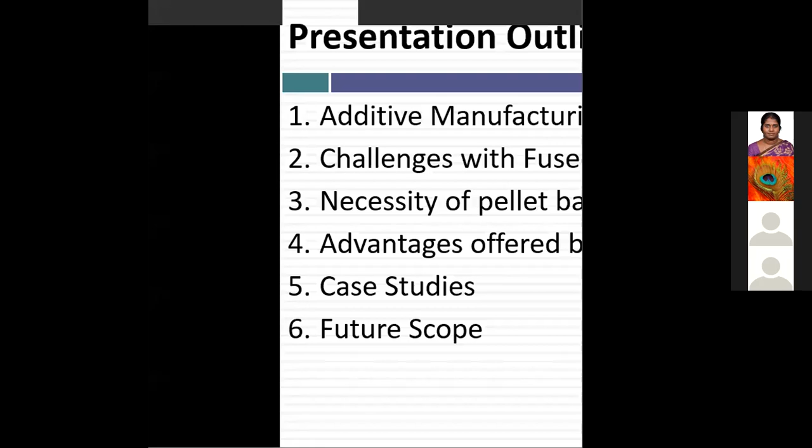Can we hide this? So these are my presentation outline. Ma'am, can you see my screen? Hello, sir, my screen is visible to you? Yeah, yes sir. Yes sir. Okay, okay, so these are my outlines for presentation.

First, I am going to give you an idea about additive manufacturing. Then I will cover some of the challenges which we face with fused filament fabrication technique. Then I will highlight the necessity of pellet-based additive manufacturing system. Also, I will discuss the advantages offered by the pellet-based additive manufacturing system.

Then I have some case studies on which I have already worked on. I will share those studies and then tell you the opportunities from where you can get some ideas and also start your own research work. If you are doing MTech or PhD, then these topics can be good for you. Then I will also discuss future scope related to the pellet-based additive manufacturing system.

So what is additive manufacturing? As you are already aware with this process because it's the fourth day of FDP, most of the speakers might have already covered this topic, additive manufacturing. So I will give you a brief idea, then move forward toward the pellet-based additive manufacturing system.

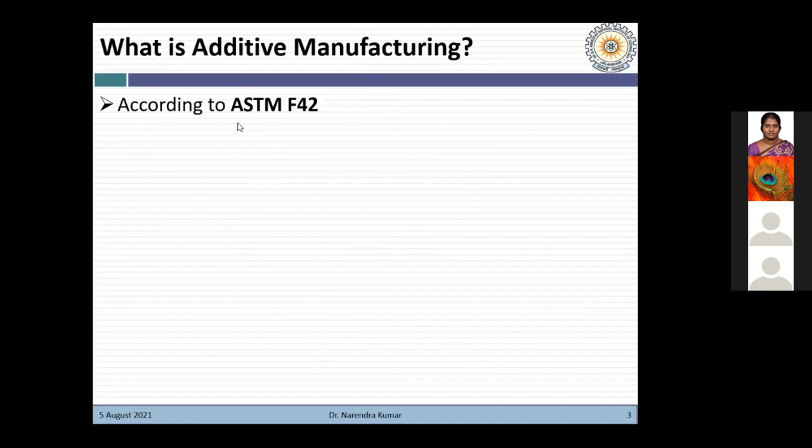So what is additive manufacturing? According to the ASTM F42 standard, it is a process of joining materials to make objects from 3D model data. So 3D model data should be there, and then we can make the objects by just joining the materials in the form of layers.

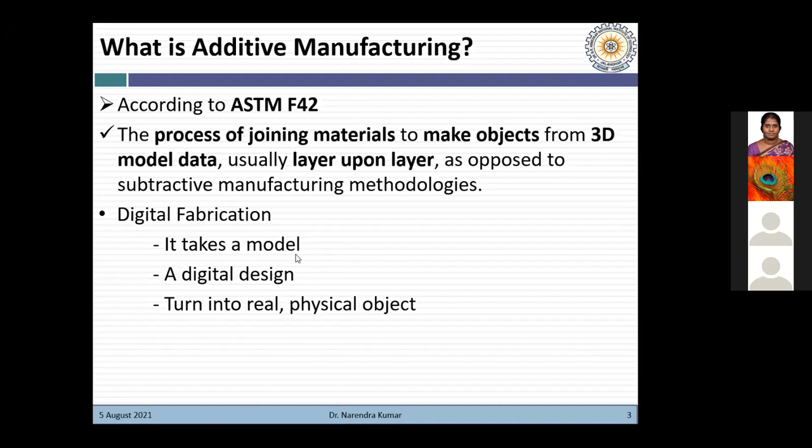So there is already a standard for additive manufacturing, called ASTM F42. They have already standardized the definition of additive manufacturing. It's a digital fabrication technique, it takes a model, meaning nothing but the 3D model data. If we have this data, then we can turn it into reality, into a physical object.

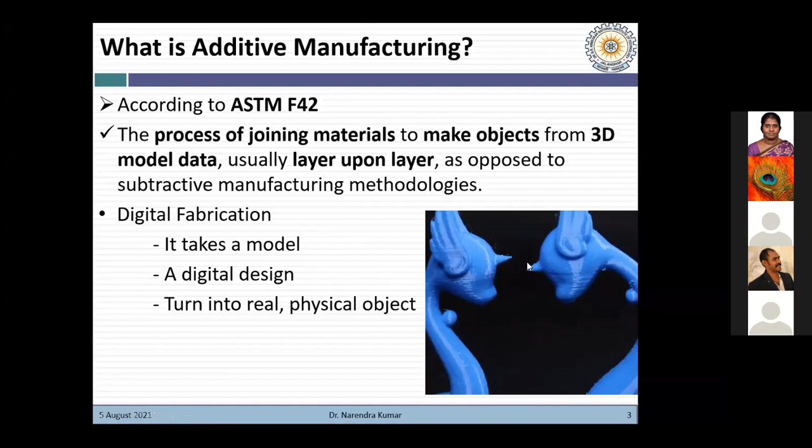Okay, so it's digital fabrication. You can see in this picture, we have a model. Initially there was a model, and then we have converted it into reality, a physical object, by just adding material in the form of layers. You can see how we are adding layer by layer, how this part is forming gradually along the Z direction. So this is the final object.

Can anyone tell me how to hide this particular option of the zoom? Can I hide it? Is there any option to hide this? Which one, sir? This one, ma'am. This is actually hiding my text. This one, ma'am. No.

So what is the process chain of additive manufacturing? First we prepare a CAD model, then move to tessellation, which is the approximation of CAD surfaces using triangles. Then we move to slicing, generate the tool path, go for part fabrication, and if post processing is required, we apply different post processing techniques on the printed parts to get the desired geometry.

So this is the process chain of additive manufacturing.

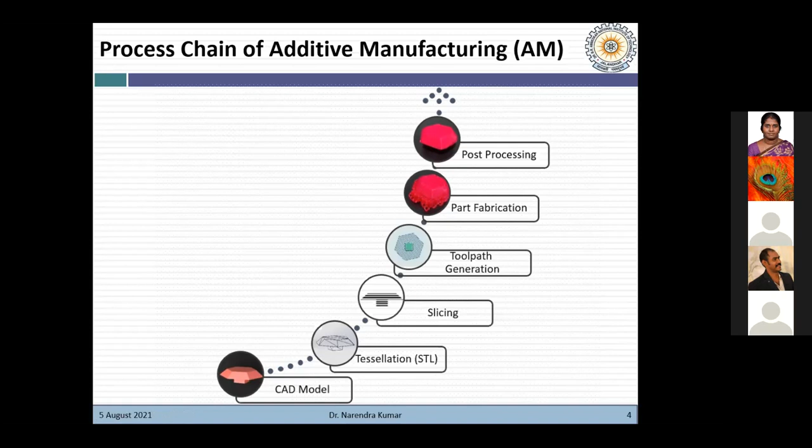What are the different types of additive manufacturing techniques available? I have categorized them based on the principle of making objects. First is material extrusion, second is vat photopolymerization, third is powder bed fusion, then material jetting, then binder jetting, and then powder bed fusion for metals.

Under material extrusion, the FDM technique is there, also known as triple F, fused filament fabrication. In this type of technique, we process the material by raising its temperature and extrude it in the form of wire using a nozzle. I will cover this process in detail.

Then we have vat photopolymerization, where we use material in liquid form. Here we have two processes, SLA and DLP.

The next category is powder bed fusion for polymers and for metals. The working principle for both processes is quite similar but there are little differences. For polymers we have SLS, selective laser sintering, and for metals we have selective laser melting, also known as direct metal laser sintering (DMLS), and another process called electron beam melting (EBM).

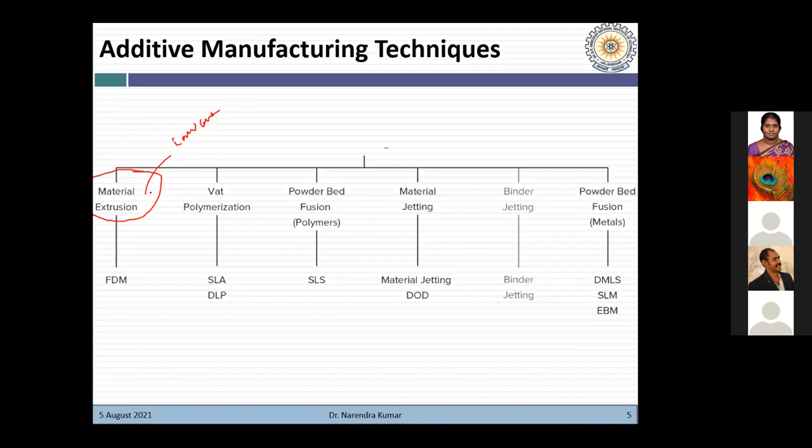This triple F process, or in short, another name for this is FDM. Most people are aware of this name, FDM. FDM and triple F are both similar in principle, but FDM is the word used by the Stratasys company, so it's more of a proprietary word given by Stratasys. That's why for open source printers, we use the term triple F, which if expanded means fused filament fabrication.

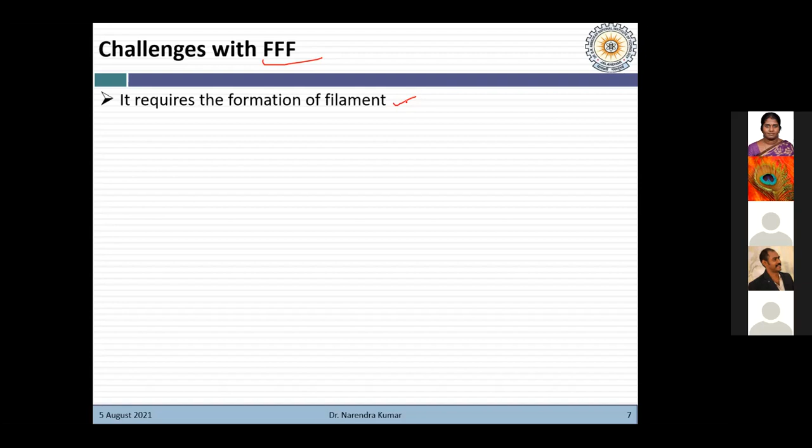Second is the requirement for material with specific mechanical properties. It means that it can process only specific materials, or special materials, which have the desired mechanical property that is required in the case of Triple F. Let me take one example to clarify this particular challenge.

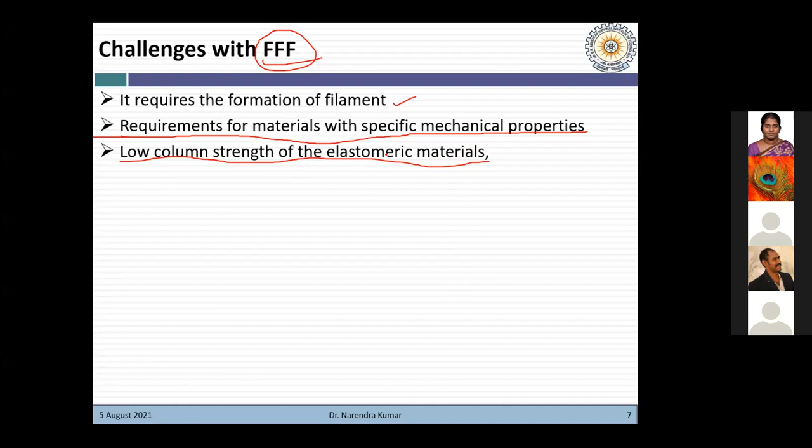So here I am giving you one property: low column strength. Low column strength of elastomeric material - due to this particular property, these kinds of materials cannot be processed easily by using these Triple F processes. So what is the meaning of this low column strength? It means that these materials are very flexible in nature.

So if we try to push - let me go back - if we try to push a flexible filament by using these rollers, what will happen? The filament will buckle, buckling will be there in between these two components. Suppose we are having a small opening, and now we are trying to insert the flexible filament into this opening - here we will observe buckling. The filament will buckle between the rollers and the liquefier opening. So due to this, what will happen?

You can see this is the case when we are feeding the rigid filament. Rigid means the normal polymer filament. When we are feeding a thermoplastic into this liquefier head of Triple F, there is no problem. These are your rollers and this is your filament, so there is no problem in the feeding of this kind of filament.

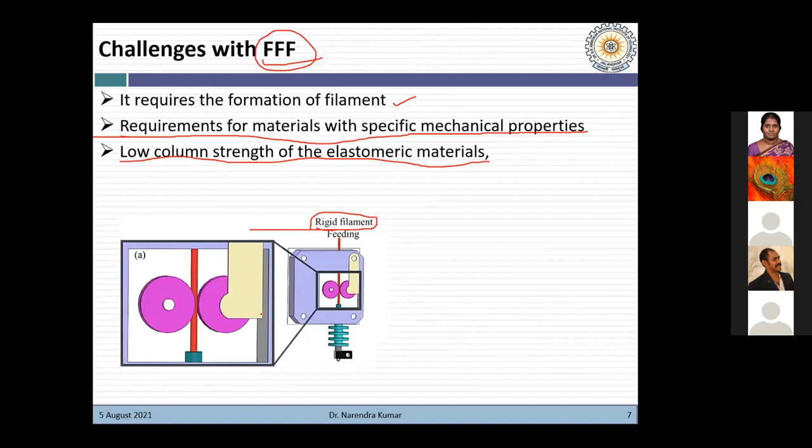But what happens when we feed the flexible filament or the elastomeric material filament into this opening? This can be the situation. Buckling may be there, and due to this buckling, we cannot process the material, or we have to modify our system, or search for an alternative to this particular process. So buckling is one of the main phenomena.

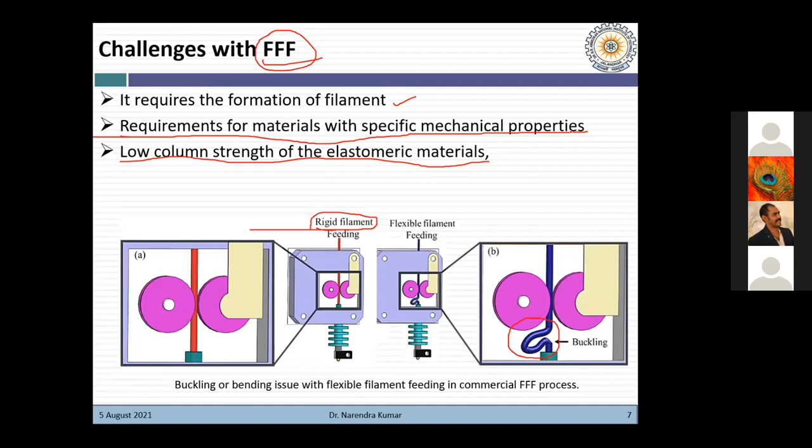That's why I am saying there is a requirement for material with specific mechanical properties. Only the materials which have the specific mechanical property can be processed by using this Triple F.

So what is the alternative? What are the alternatives available to this Triple F? The direct pellet printing can be a good option.

So suppose we develop a system in which the material form is different from the filament. A different form of the material may be the pellet.

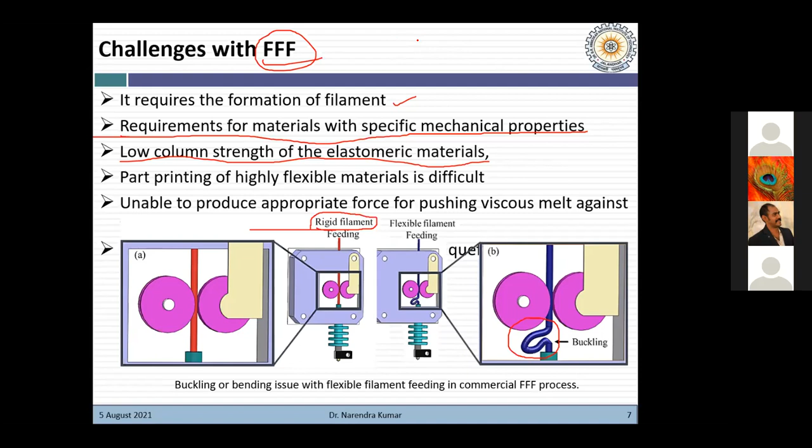Because materials are available in the pellet form easily, since injection molding machines or systems are already well established in the market. In those systems, we are already processing material in the form of pellets. So if we develop a pellet-based system, it could give us better results, and also give flexibility in using different materials. So direct pellet printing can be a good option.

You can see this is a printer which supports direct pellet printing. You need to feed the material in the pellet form. So here we have an arrangement in which we can feed this material in the pellet form.

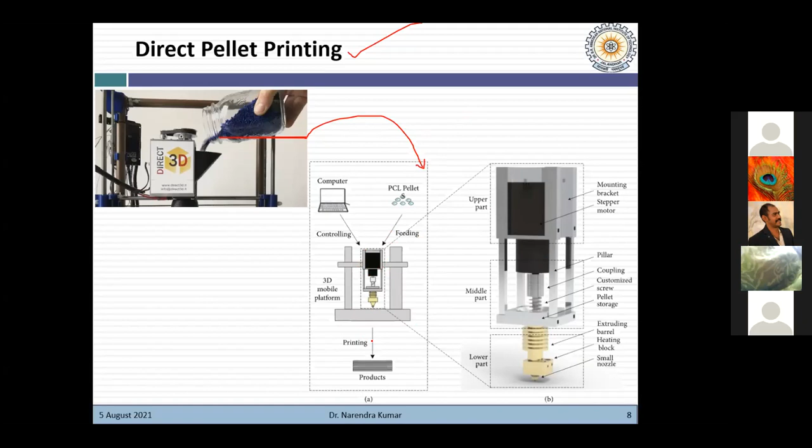This is schematically how the direct pellet printing process is shown. At the top we have a motor, then a coupling, then a mechanism to process the material in the pellet form. This particular extruder head, or special extruder head, can be mounted on the 3-axis positioning system. We have attached this extruder head on the CNC positioning system to create 3D objects. In this way, we can perform 3D printing of different materials.

So what are the advantages offered by the direct pellet printing systems? The first advantage is reduced melt solidification steps. So what is the meaning of this statement?

The meaning is, there is no need of filament. We do not need to convert the material into filament form, because initially we have pellets, then we convert those pellets into filament form, and only then can we process the material through the Triple F process. But in the case of direct pellet printing, we can directly process the pellet form of the material. In this way, we can reduce the melt solidification steps, as there is no need to remelt the material again for filament manufacturing or fabrication. So this is one of the advantages.

Second is the elimination of the filament extruder system. Here we can eliminate the filament extruder system and make a different type of extruder system that should be compatible with the pellet form of the material.

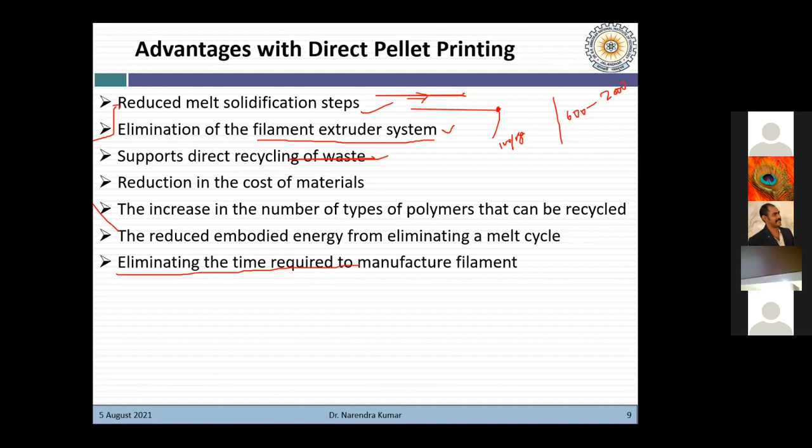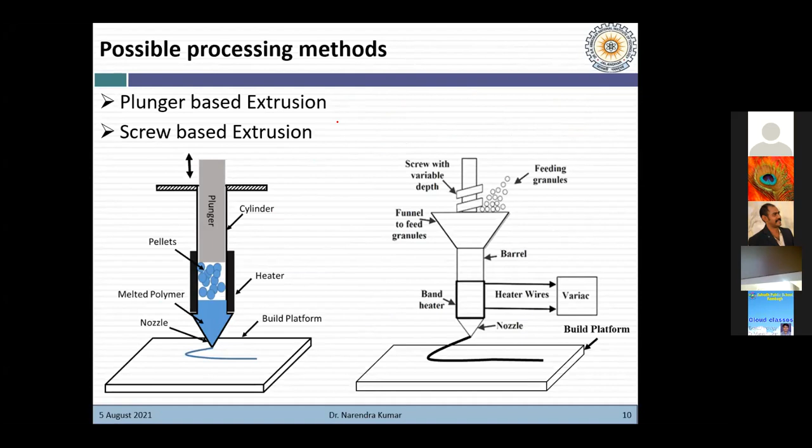So what are the possible processing methods we have? If we are planning to make a pellet-based additive manufacturing system, what kind of methods can we use? The first method is plunger based extrusion, and the second is screw based extrusion systems.

So here you can see the schematic diagrams of these two principles. In the first one, we use a plunger, which is basically a piston that moves in a to-and-fro direction. When it moves downward, we get extrusion of the material. In this cylinder volume, we can fill the pellet form of material, and here we have a heater which is used to raise the temperature of the material. Then we can extrude it from this small, tiny nozzle.

And in the second principle, we have a different mechanism for processing the pellet form of material. Here we have a screw and barrel assembly, with a barrel and a screw having variable depth similar to injection molding, which is used to process these granules or pellets. Again, we have a similar arrangement of heater and nozzle, from which we extrude the material in the form of a thin wire. So at the bottom stage, the same principle is used, but the material processing techniques, or the principle of material processing, are different in these two systems.

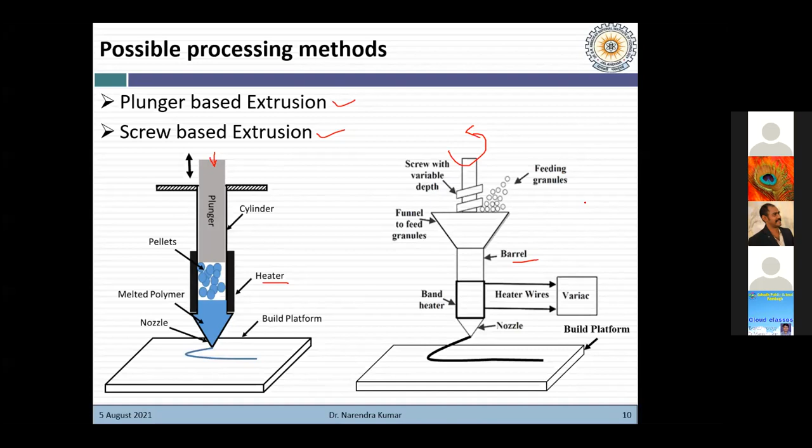That's why it is more useful in additive manufacturing, because nowadays people are focusing on composite part fabrication, polymer composite part fabrication. So tomorrow I will cover one lecture on polymer composite processing in additive manufacturing, where I will explain how to process a polymer composite material through FFF, what different methods we can use, and what different characterization techniques we have.

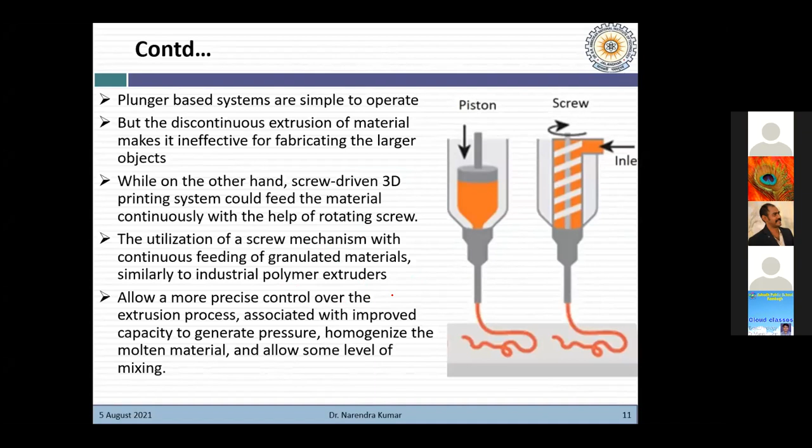So you can see the screw-based additive manufacturing systems are quite useful and can be explored further. I have some case studies on which I have already worked. A direct pellet printing system was developed by me during my PhD work, and I am currently exploring this area in a different direction. So I will show you those case studies, and accordingly you can think about direct pellet printing and its benefits.

So the first case study is the in-house development of a direct pellet printing enabled additive manufacturing system. In order to develop a pellet based additive manufacturing system, you can see the schematic diagram of the developed direct pellet printing system.

At the center, we have mounted a special material deposition tool that was also developed by us in the institute itself. It can be mounted on the spindle of the machining center. Here we have an enlarged view - the spindle is there, and here we have the deposition tool, mounted very easily on the center.

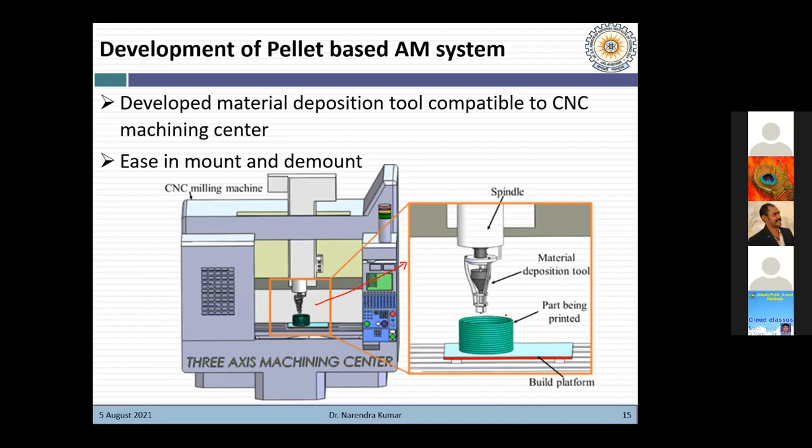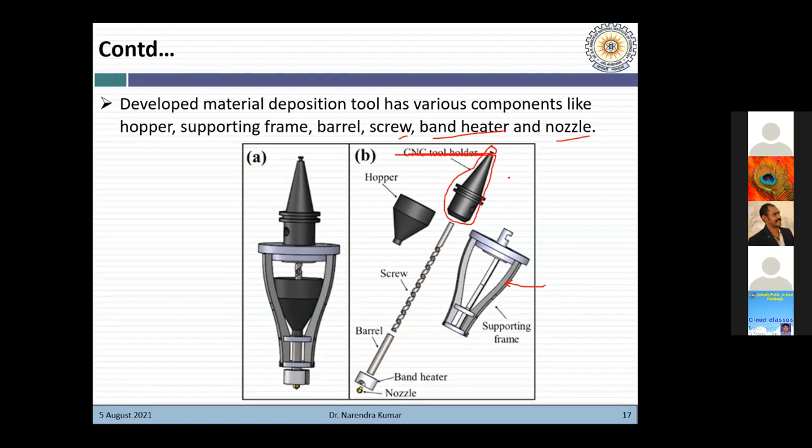Initially, we thought to explore standard materials because we wanted to see the performance of our system. So we started with ABS material, acrylonitrile butadiene styrene, which is a very standard material for the FFF process. All the process parameters are already known for that material, so we thought we should start with ABS, then move forward slowly toward other materials not already available for FFF. Initially we didn't have any idea how to proceed, so at that time we started with ABS.

You can see the shape and size of the part. Initially we were not able to extrude material in the desired pattern because we were not able to control the temperature properly, and various issues were there. Some issues to mention: blockage at the entrance of the barrel due to high temperature - a lot of blockage was there, so we were unable to feed material properly, and a lump of material formed at the entrance where material was entering into the barrel.

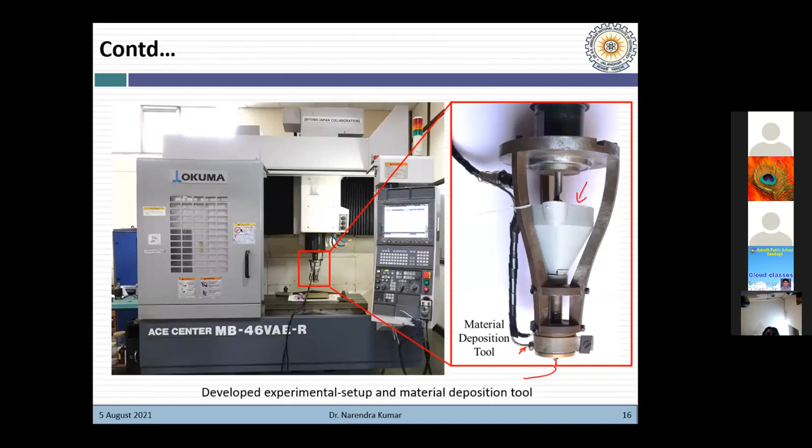Also during extrusion we were getting variation in the diameter, because at the bottom we had a nozzle - here you can see the nozzle. So we were facing the problem of variation in the filament, meaning extrusion variation, and also material degradation due to excess heating. We observed different colors at different portions of the part, so material degradation was visible. Also, there was discontinuous extrusion of material - sometimes we were having extrusion and sometimes we were not able to extrude material from the nozzle due to blockage and other reasons.

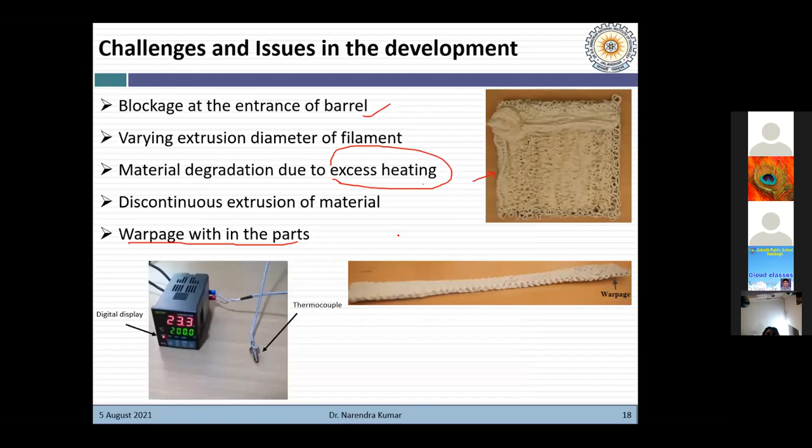Another problem was the software, because we didn't have any software for additive manufacturing. Standard machining centers are capable to remove material - if we have a workpiece, we can remove undesired material to get the desired geometry. But here the principle is different, because in additive manufacturing we make parts by adding material in the form of layers. So we didn't have any software for additive manufacturing.

So we developed our own software using MATLAB. We merged all the steps like STL import, slicing, toolpath generation, and G-code generation into necessary steps for generating toolpath, and we developed a user-friendly graphic user interface. So a GUI was developed that was very user-friendly.

We have provided a window on which you can see your STL file. Whatever STL file was imported into the software, you can see it in this window. And here we have provided a provision to change the value of process parameters - like layer thickness, currently flashing 0.1, which can be varied between 0.1 to 2 mm.

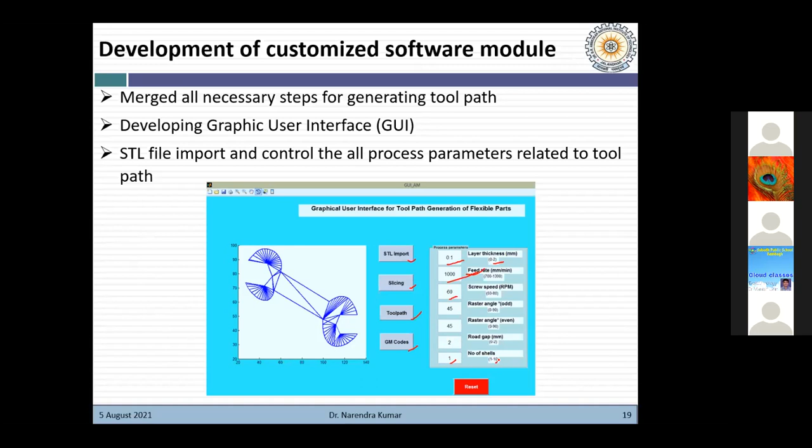Since we used a screw-based mechanism, 60 RPM was the speed of the screw, and raster angle was standard at 45 degrees. Road gap can be selected as per your requirement and application, and also the number of shells - shells means contours, how many contours you want around the periphery. Number of shells can be varied from 1 to 10, so you can choose according to your requirement.

Some features of the system software: import and processing of STL was quite easy in the developed software. Also slicing, then toolpath generation compatible to CNC machining centers.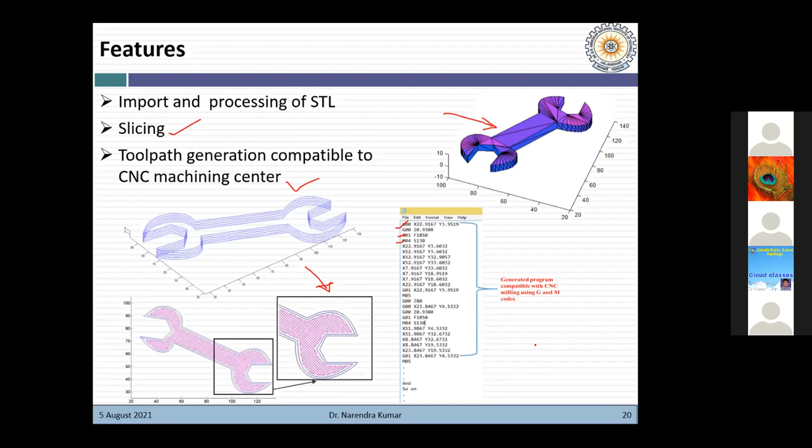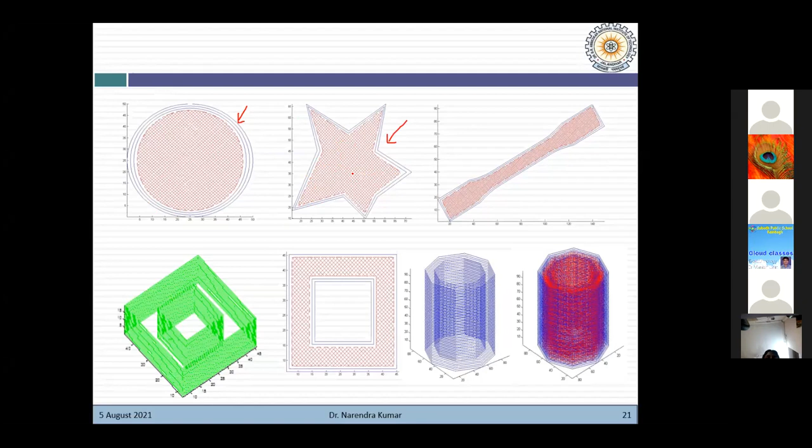Some other features of the software - in the first picture you can see we used 3 contours, 1, 2, 3, and the inner space is filled using a crisscross pattern. Similarly, here is another geometry generated with 2 contours or 2 shells, crisscross pattern again, and this is your tensile dogbone specimen, also generated with 2 shells and crisscross pattern.

This particular model has a hole at the center - a square shape hole. So again you can see the software was capable of dealing with different kinds of geometry, whether it is a solid geometry or a solid geometry with a hole.

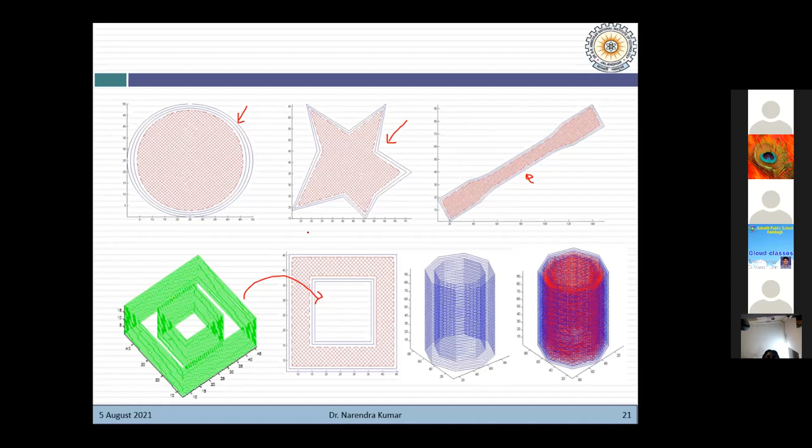Initially we printed this kind of product using ABS material, and you can see the quality of the parts is not that much good, but later on we improved a lot. I will show you some other pictures of the printed parts.

Another case study which we have already covered using this particular setup is flexible part fabrication using EVA material. I have already highlighted the challenges of FFF, discussing the difficulty of processing elastomeric material because they are very flexible in nature. That's why we cannot process those flexible materials using the FFF process. So we thought to explore this particular part fabrication through our setup.

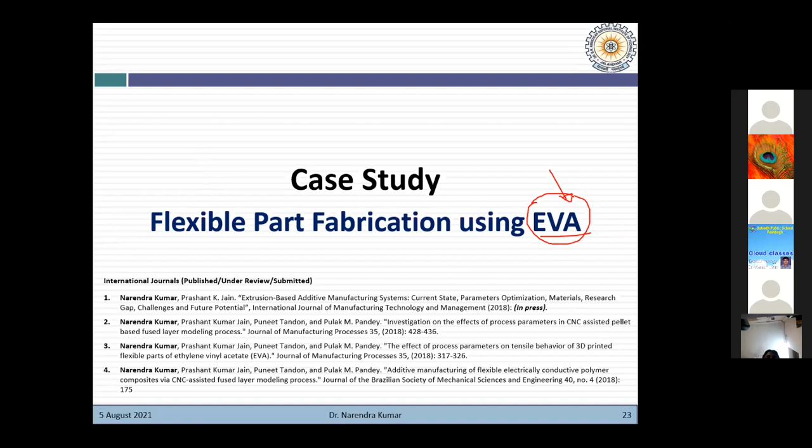EVA is one of the materials that is not available in the material library of FFF, but it is used more frequently in various applications. That's why we started with this EVA material, which stands for ethylene vinyl acetate. We selected it because it is flexible in nature.

We extruded this material from our setup. As you can see from the nozzle, we got this kind of profile in thin wire form. We initially explored this material to see whether it is extrudable or not, and it was extrudable, so we got this kind of thin wire profile in the initial experiment.

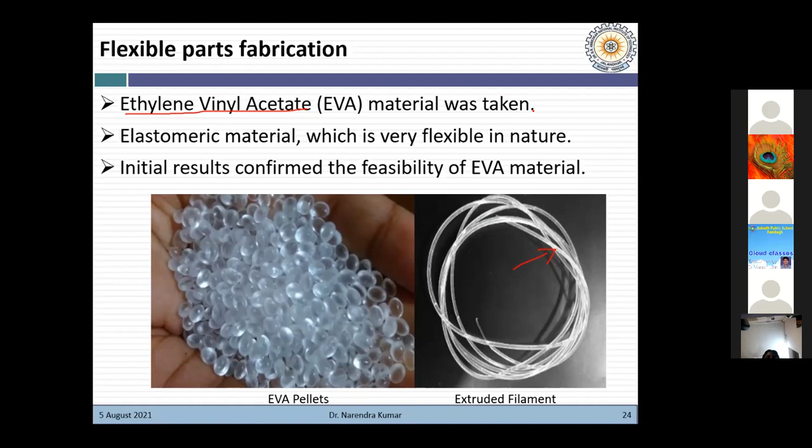Then we performed a parametric optimization. For this material, we optimized the temperature, the bed temperature, the screw speed, and the deposition speed. Various parameters were optimized by conducting the study, and statistical analysis was used to optimize the process parameters. Based on those results, a set of suitable parameters was obtained for this particular material.

Because we found out the range of different process parameters, we then tried to print some of the parts. I have compared these parts with this particular coin. Here you can see one part made by EVA, then again another part, then another part with a hole, and here a sole was also tried using this material.

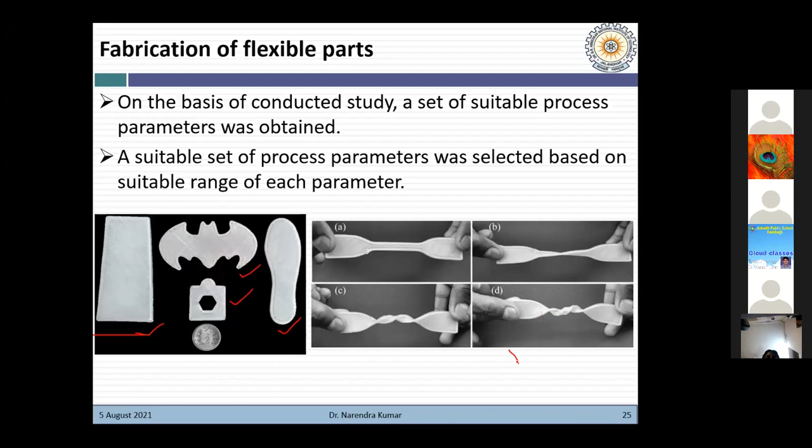In order to demonstrate the flexibility within the fabricated parts, one part was fabricated in the form of a dog bone, and then it was twisted like this, manually. You can see the results - there was no problem in the twisting, and we were able to twist it easily. This shows the flexibility within the specimens.

In order to characterize the flexibility within the specimen, we went through the hysteresis test. This test gives us the graph between residual deformation and deformation percentage. Initially we deform the specimen up to a certain percentage, then release the load and record the residual deformation. When we stretch these specimens up to 60%, only 1% residual deformation was there. Similarly for 90%, 9% residual deformation was there, and for 120%, 19.70% deformation was there. In this way, we have quantified the flexibility - this is one of the tests used for flexibility purposes.

In this picture, you can see we observed very good bonding between the rasters. Whatever material we deposited for the part fabrication, we found very good bonding between the raster. You can see the bonding between this contour and this raster - these are the rasters - so you can see good bonding between contour and rasters, and between rasters also.

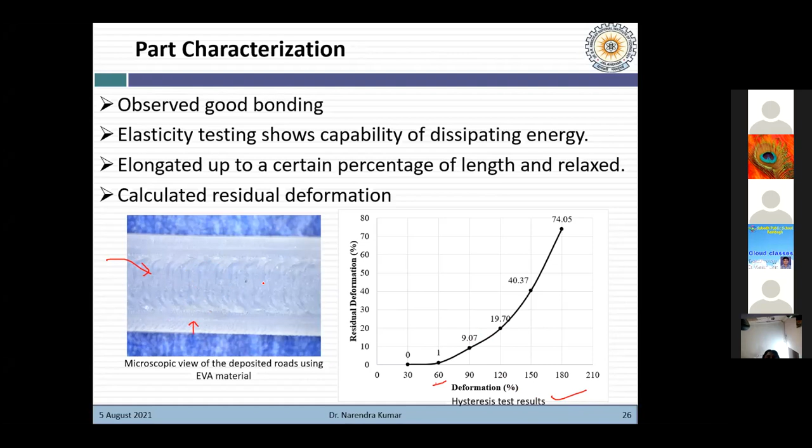So another case study is the flexible electrically conductive composite fabrication. Because we were able to extrude a material, EVA material, in the form of thin wire, we were also able to fabricate the flexible parts of neat EVA. So we thought we should extend our study in this direction, because we found a lot of applications of flexible electrically conductive composites.

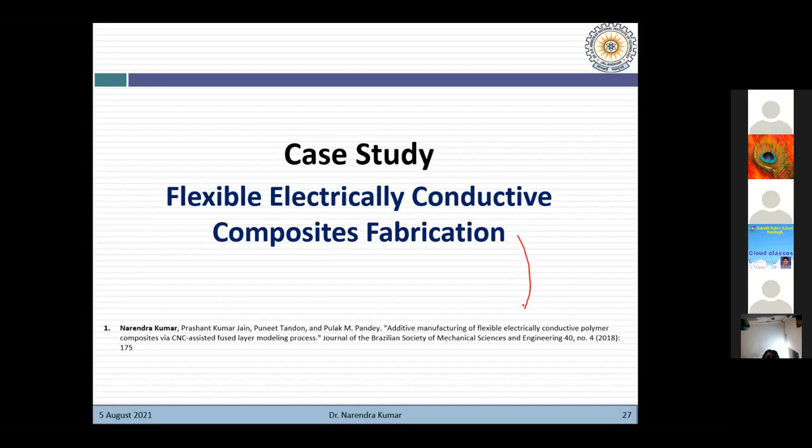More information about this case study can be found in my publication, where I have mentioned the details. Before conducting this study, we tried to find out some related research work in the literature.

In the first work, Rymansaib et al. used the FFF process with thermoplastic polystyrene as the polymer matrix, and carbon nanofiber, CNF, as the filler material. They evaluated the electrical conductive property.

Second is Wei et al., who again used ABS material as the polymer matrix. Similarly, Gnanasekaran used PBT, and Leigh et al. used PCL material. If you look at this literature, you will find all these materials are rigid in nature.

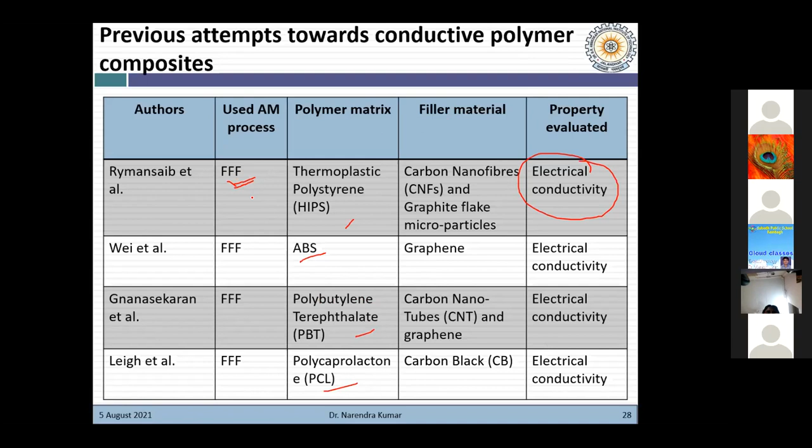All materials are rigid in nature, so very few studies were available in this domain. People have not explored flexible electrically conductive polymer composite fabrication through FFF, because as I told you already, there are a lot of challenges when we deal with flexible materials.

That's why we thought we should explore the different applications of flexible electrically conductive composites. We fabricated the specimens and tested them for different properties.

So what is the need of flexible electrically conductive composites? You can see the applications of flexible electrically conductive polymer composites have increased over time, because a lot of methods are now available for fabrication, so applications are increasing day by day. They can be used in health monitoring applications, displays, pressure sensors, and flexible circuit fabrication.

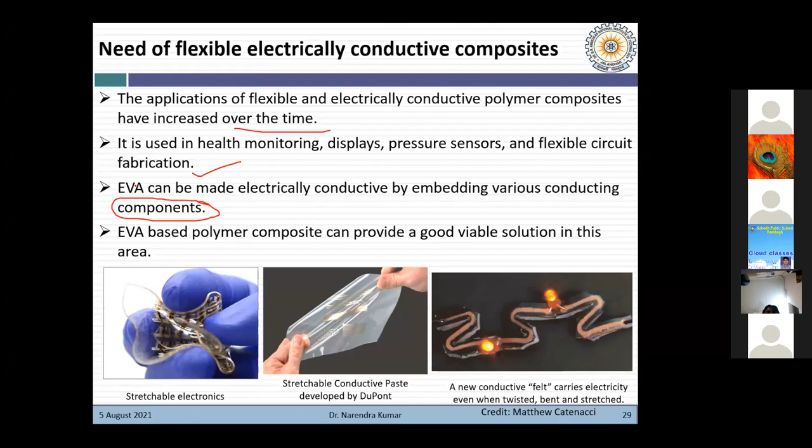EVA, as we have explored, can be made electrically conductive by embedding various conductive components. Conductive particles may be added in order to make it conductive. For this, we use graphite as a reinforced particle, or filler particle.

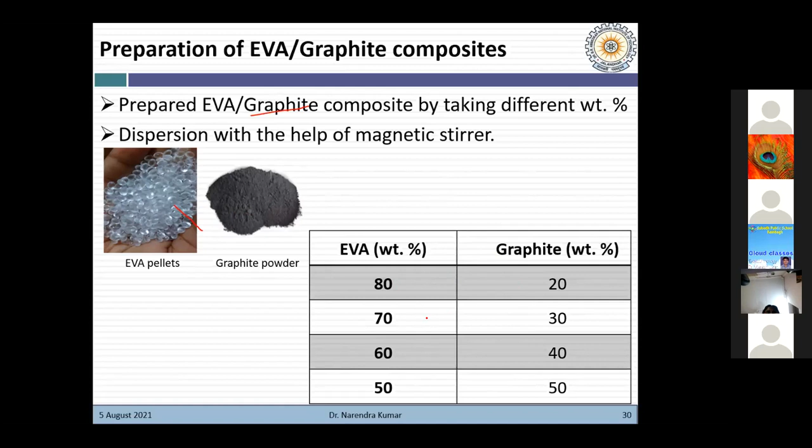So these are the EVA pellets, and this is the graphite powder. Different weight percentages of these two materials were taken for the fabrication, and this is the methodology we adopted for the composite preparation. Initially...

In the form of filament, then again re-extruded.

Hello. Am I audible? Yes, sir. Okay, screen is not visible. Let me check, I think there was some technical problem. Someone has started recording, that's why. Now, is it visible? Yes sir, it is visible now. So what you can see on my screen? Methodology adopted. Okay, thank you.

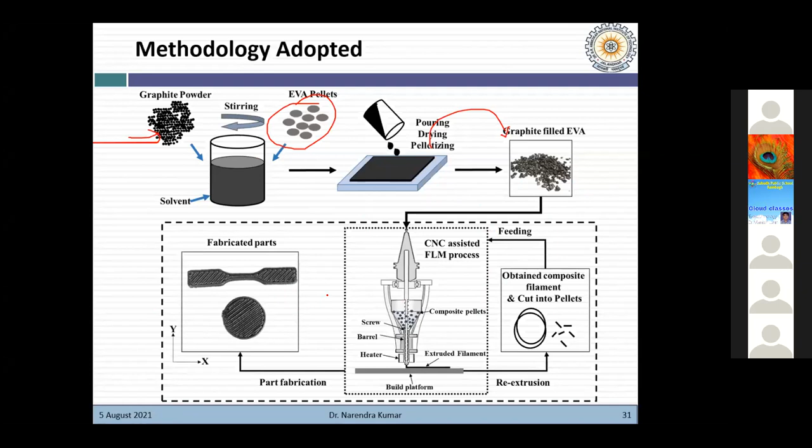Here you can see we have printed this kind of profile, and then we went for characterization. SEM, XRD, and FTIR characterization techniques were used to check the quality of the developed composite. You can find more detail in the research paper, here I'm just giving you a summary.

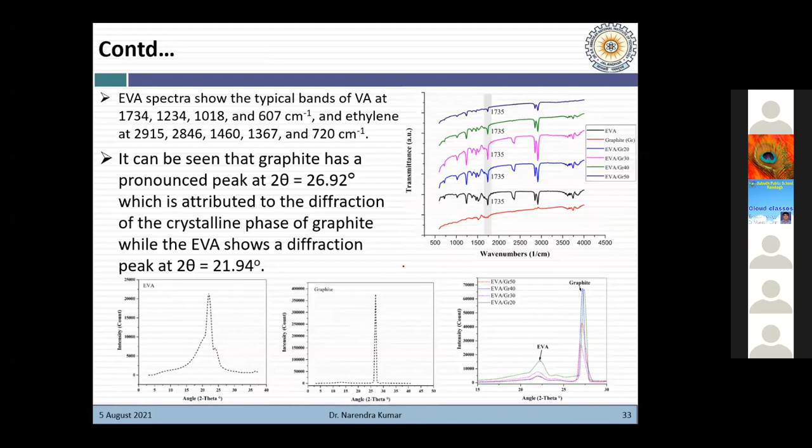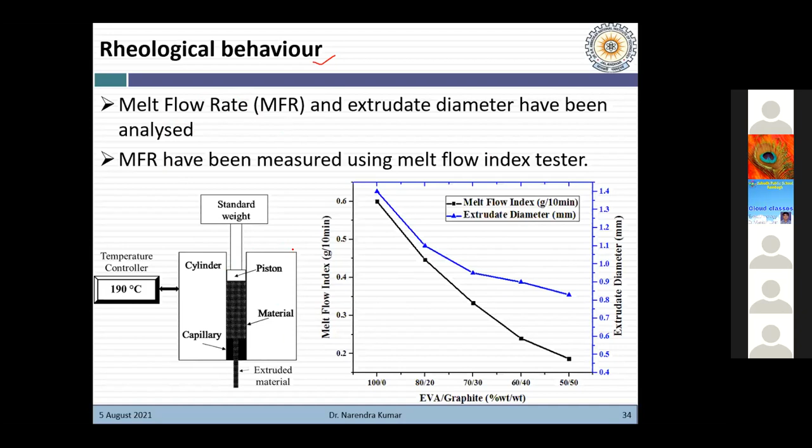After characterization of the material, rheological behavior was also tested. We tested the melt flow rate and the melt extruded diameter, because this is very important in 3D printing, since polymer swells when it is extruded from the nozzle. We quantified the extruded diameter for different temperature ranges and different compositions. To quantify the melt flow rate, we used a melt flow index tester. So these are the results.

Due to shortage of time, I am going to cover this case study quickly, because I have some other case studies which I want to show you.

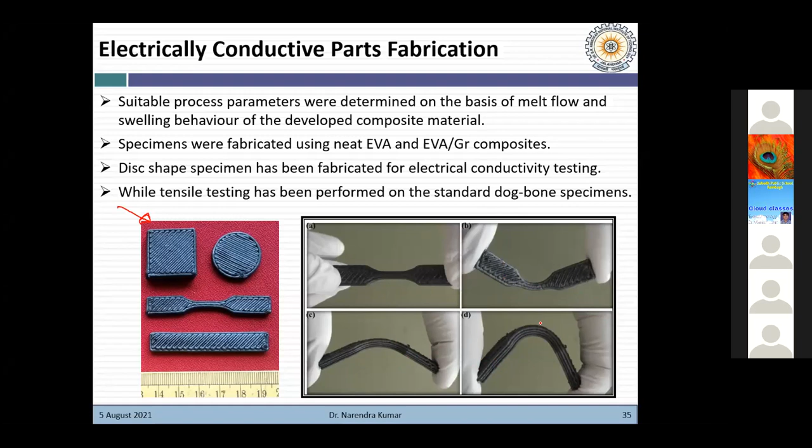So, electrically conductive part fabrication. We prepared some specimens for electrical property testing and mechanical property characterization. The parts made using EVA and graphite were also flexible in nature, but flexibility was less as compared to the neat EVA. I will tell you the reasons.

For electrical characterization, we used the 4-probe method. As per the classical percolation theory, the polymer composite can achieve electrical conductivity when the volume or weight fraction of the filler material is above a specified value. For a low volume fraction, the graphite particles are not touching each other, so the polymer matrix is not electrically conductive.

But once we keep adding reinforcement particles into the polymer matrix, this is the situation - for example, here 5 graphite particles are there, but they are not making any network. When we increase the fraction of filler material, this kind of network is formed within the polymer matrix, which makes it conductive.

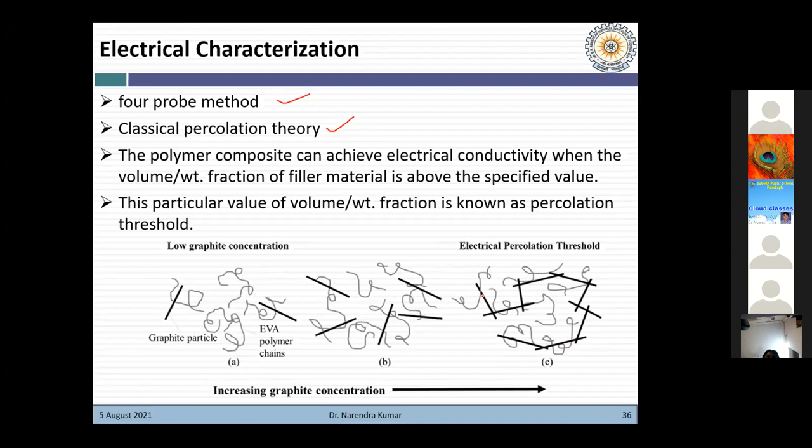In our case, we got the electrical percolation threshold value at this point, 70-30. We also compared the electrical conductivity of neat EVA to that of graphite-filled EVA, and observed a 539 times improvement in electrical conductivity as compared to neat EVA.

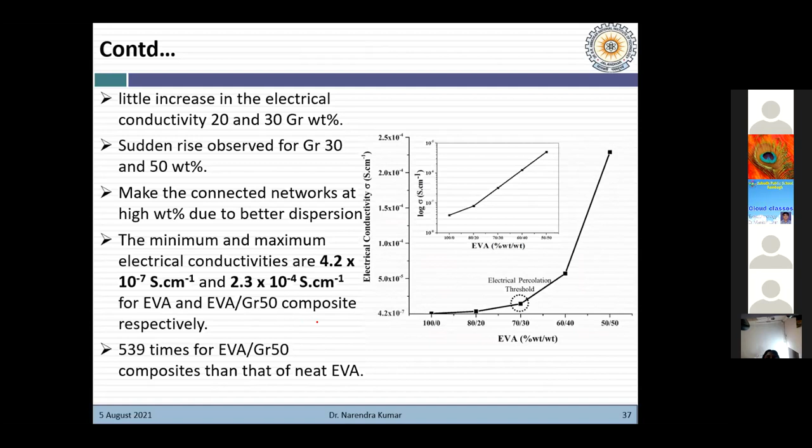Because we felt that the mechanical properties of the specimens had degraded, we took SEM images for the broken samples. You can see poor bonding was there because viscosity was increased, that's why poor bonding may be observed here - this is one raster, this is another raster. You can see these kinds of holes were available within the specimens.

These small holes are observed here. This is the result for tensile strength and elongation at break. Both were degraded when we added graphite particles into the EVA matrix.

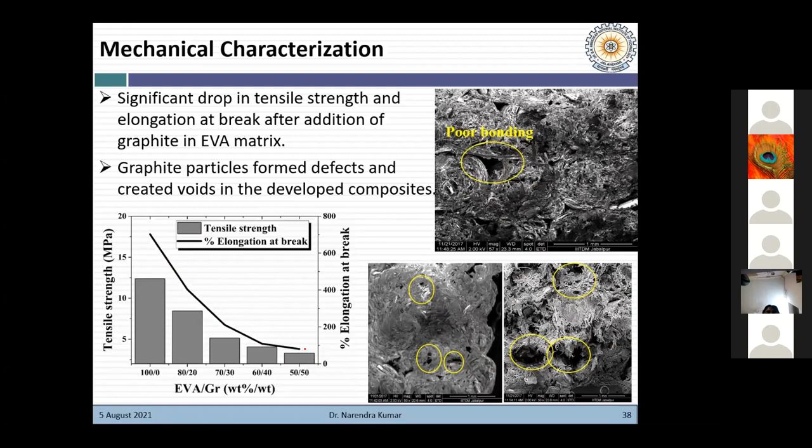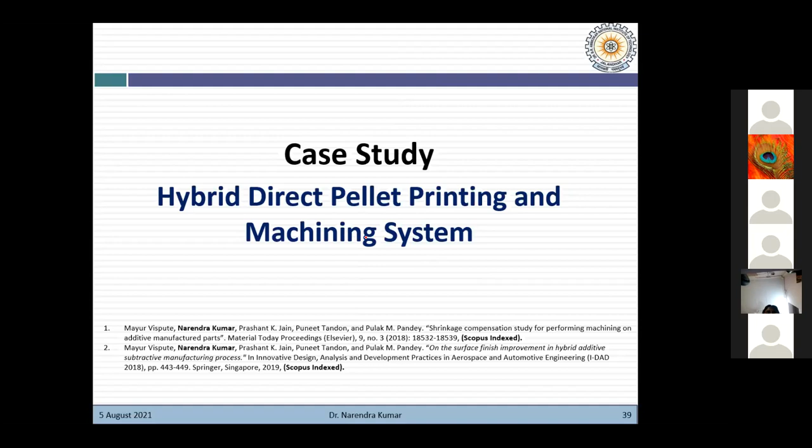Another case study we attempted is the hybrid direct pellet printing and machining system. Since we were using a CNC machining center for additive manufacturing purposes, we explored the same setup for machining also. We developed a hybrid direct pellet printing and machining system, where first we performed additive manufacturing, then machined the same part.

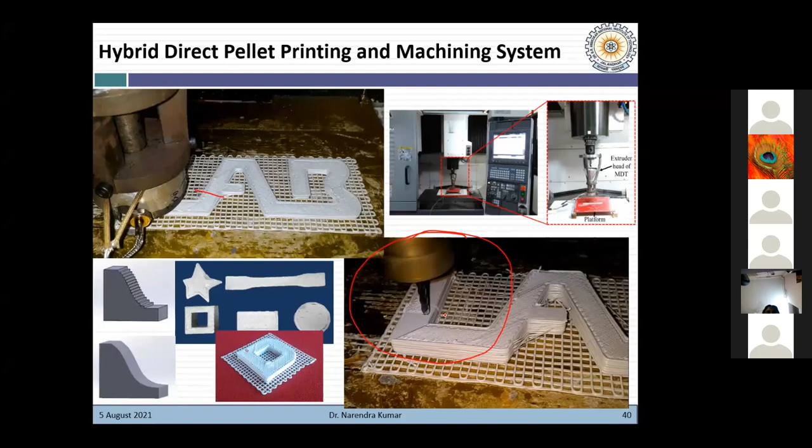Here you can see we are fabricating a part using additive manufacturing, and at the bottom here, the machining tool is removing material from the top surface. Again we faced some problem in the part program generation.

For this, we developed a software for the hybrid system. We have provision for additive manufacturing and also the option of subtractive manufacturing, so either you can perform both, or go for additive manufacturing alone. We provided some parameters - step over can be given, cutter diameter can be given - and accordingly it will generate the tool path, considering different surfaces, less than 90 or equal to 90 degrees.

Here you can see the results. Looking at this particular part, the surface is not that good before, but this is after the machining operation. Before machining, the roughness was around 19.495 microns, but after machining it was 2.068. In this graph, you can see after machining we have written 'CAD/CAM lab' - the quality of the job surface is very good.

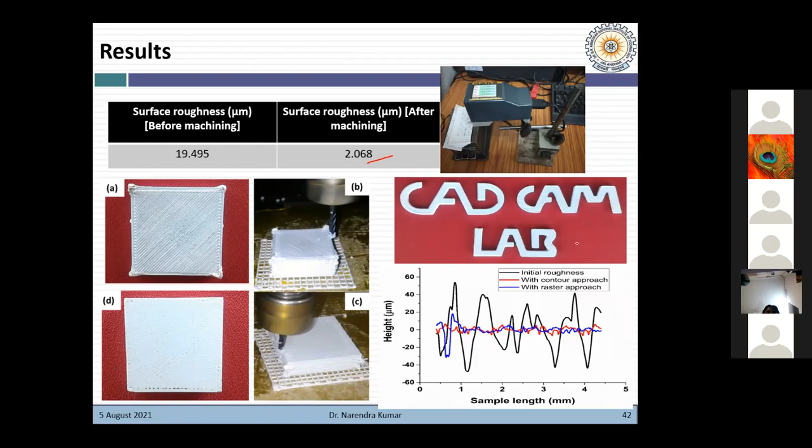We also explored our setup for large part fabrication, because this is again a problem - if you look at available FFF printers, you will find very small size FFF printers are there. Since we were using a CNC milling machine in our research, we thought we should explore this area also. Large part fabrication was attempted because we wanted to see the feasibility, whether it could be done or not.

We increased the nozzle size from 0.4 to 5 mm, then attempted some of the shapes.

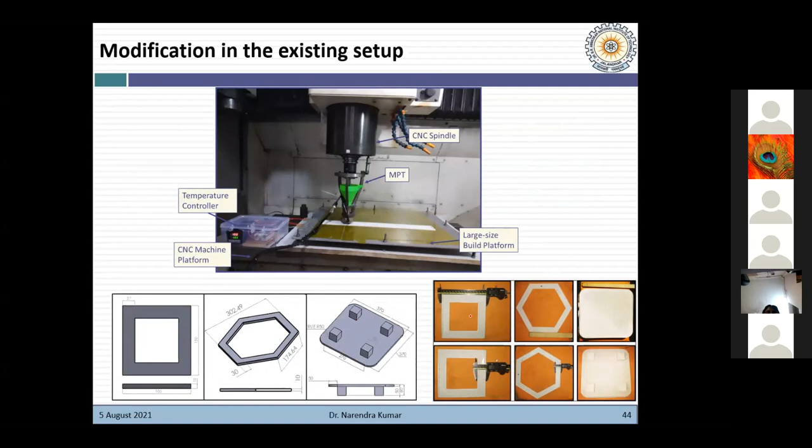So you can see the size was increased from the small one to the large one. So this is the size of the part.

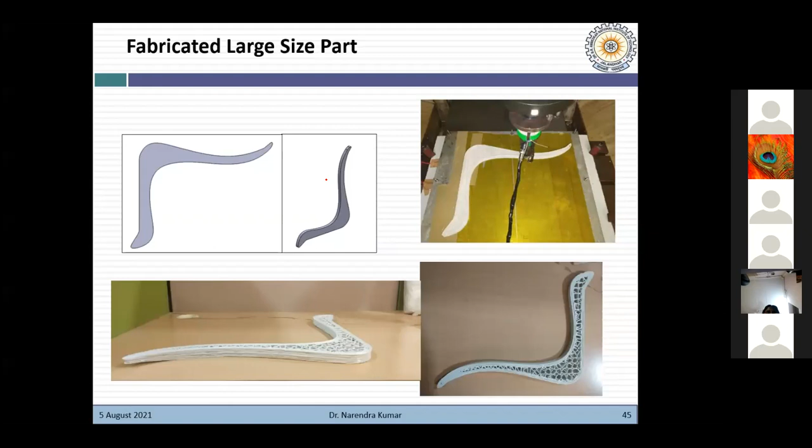A lot of factors were considered for the large part fabrication, so a lot of research is needed in this area. I will give you an idea of how you can start your research work in this area for large part fabrication. Many industries are also working on this, trying to make large size parts. Some of them are working on construction applications, making homes using additive manufacturing. So they are attempting this kind of work.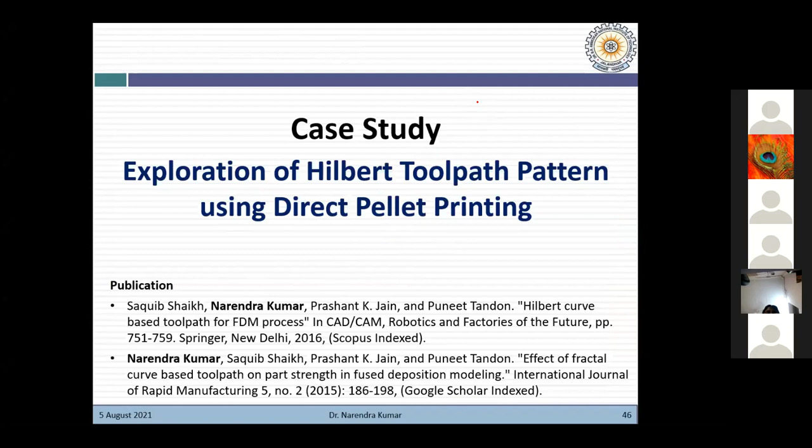Another case study is on the exploration of the Hilbert tool path pattern, because most parts were fabricated using a raster tool path pattern. So we observed some problems with the raster tool path. The delay time was the main factor in the case of raster.

So what is delay time? Delay time is the time difference for the nozzle to pass between any two adjacent points. Consider any point - here in this example I have considered these two points, 1 and 4. I have assigned number 1 to this point and number 4 to this point. If you look at the colors, you will find a lot of difference between these two colors. Why? Because it is showing the temperature difference.

Due to this temperature difference, the nozzle is moving in this direction. Suppose this is 100mm, so the nozzle will move from 0 to 100 first, then let me assume this is 2mm, then 2, then it will come back along this raster, say it is 70. So how much distance has the nozzle traveled? 100 plus 2 is 102, plus 70 is 172.

If I consider the speed of deposition, I can easily calculate the travel time - how much time it has taken by the nozzle from this point to this point. Due to this time difference, we will get poor mechanical property between these two points. But for these two points, the nozzle is moving from here to here, so this time difference is very short. This leads to uneven properties within the specimen or within the parts.

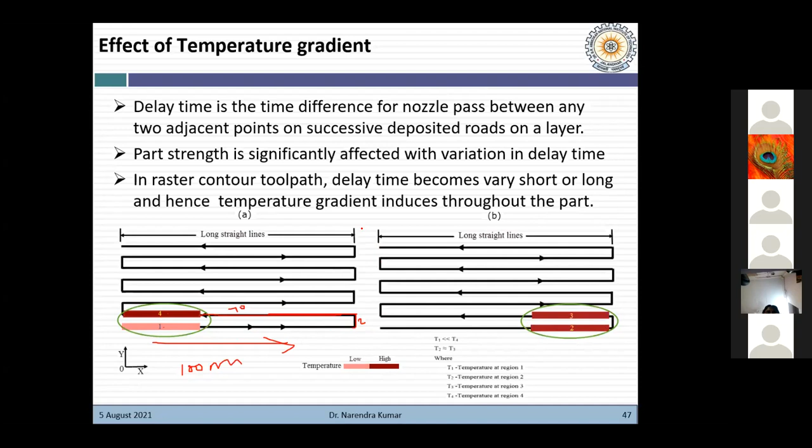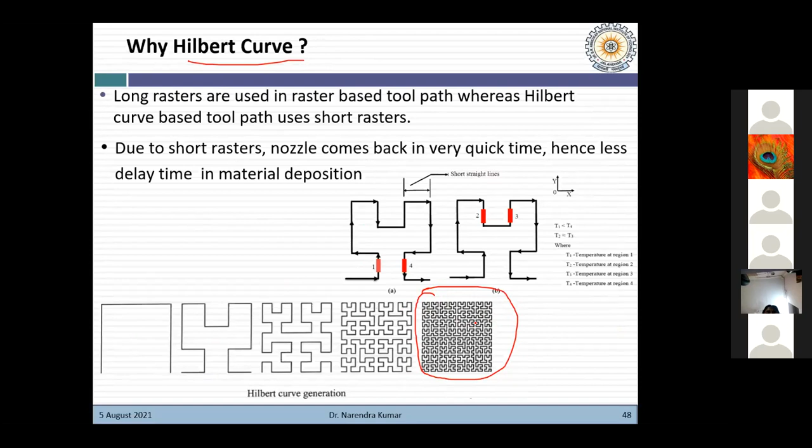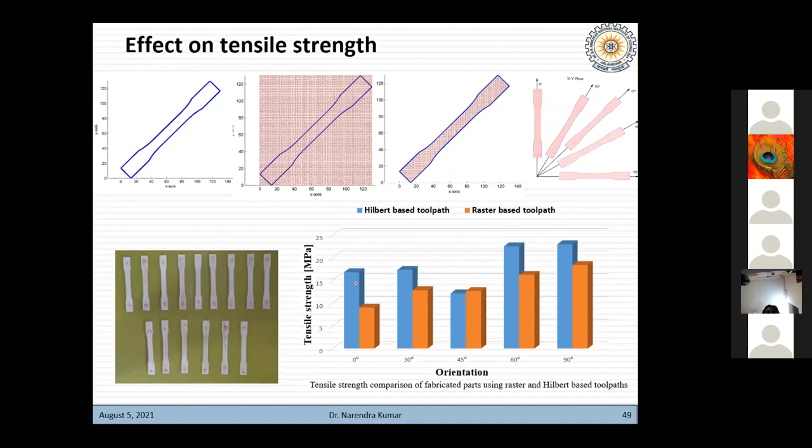So we developed a software, or added this pattern to our software. These kinds of specimens were prepared to see the performance, and you can see the difference in tensile strength. The orange one is for the raster based toolpath, and these parts are made using Hilbert based toolpath. You can see the difference - parts made with Hilbert curve based toolpath are superior in terms of tensile strength compared to the raster one.

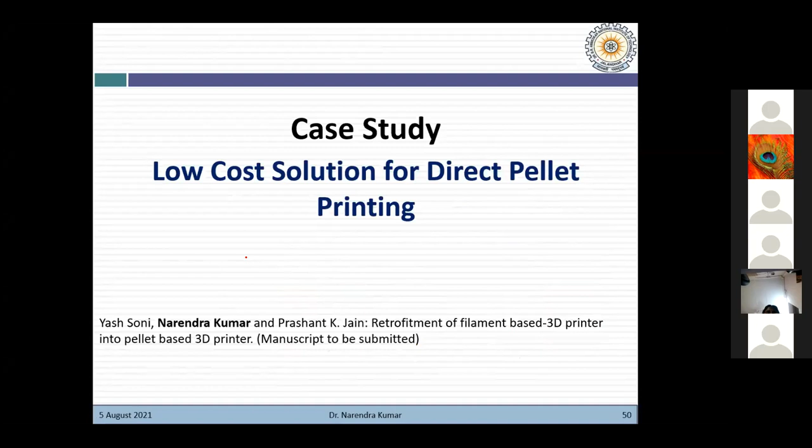Another case study - because we were using a CNC machine, and CNC machines are almost very costly, we thought we should explore or develop a low cost solution for direct pellet printing. Suppose you don't have a CNC machine in your institute, then how can you start your research work, or how to proceed in this area?

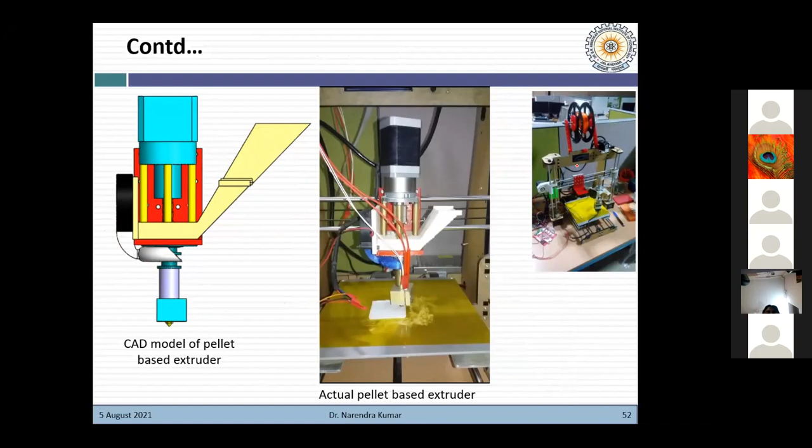And this is the setup with the final version of the extruder head and the machine. So we printed these kinds of shapes initially.

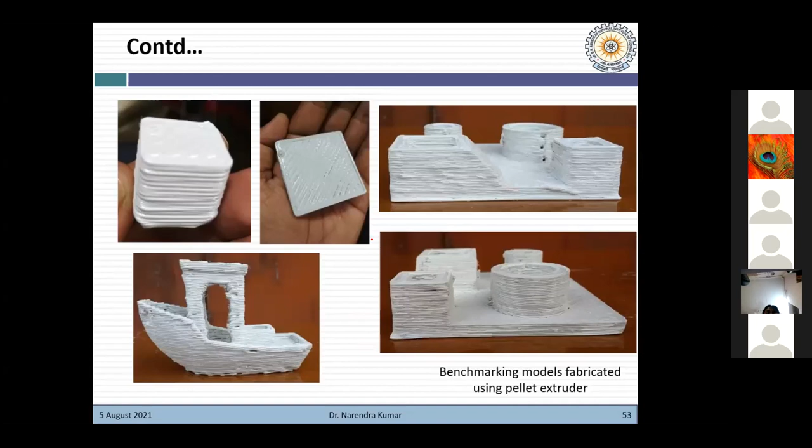So this is all about from my side about the case studies. Now I want to tell you some more case studies which I found in literature based on direct pellet printing.

First is the direct waste printing of polylactic acid with a universal pellet extruder. Direct waste printing means, because polylactic acid waste was already available with these authors, they thought to explore or use this waste material by using this universal pellet extruder head.

You can find the detail of this paper; I have already taken the detail here. Alexandre et al. carried out this work. The paper name is 'The Mechanical Property of Direct Waste Printing of Polylactic Acid with Universal Pellet Extruder, Comparison to Fused Filament Fabrication.' They compared the performance of this particular head with FFF. This paper is published in the Journal of 3D Printing and Additive Manufacturing in 2020.

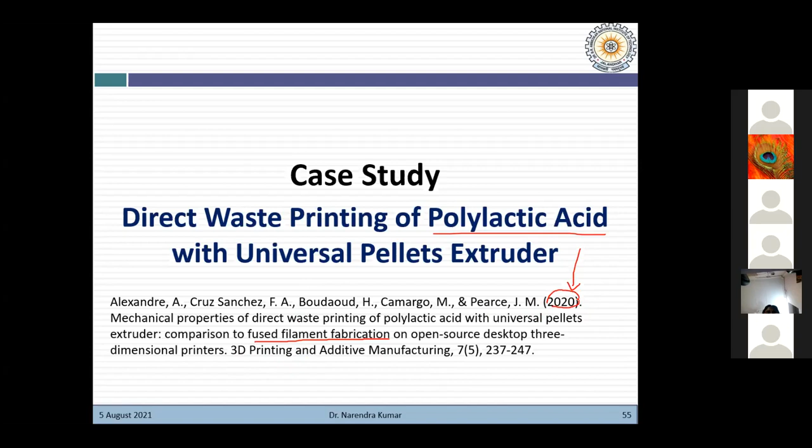So recently they published this paper. I worked on this a long back, I started my research work around 2015, but they published this paper recently in 2020. So you can find more detail, you can see their setup. They have used a similar setup as we have done, but their extruder head is different from ours. You can see the parts, the size of the parts, and also the quality of the parts.

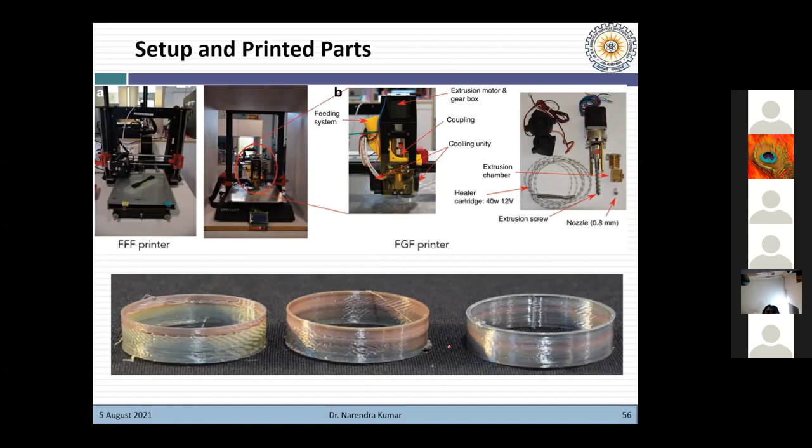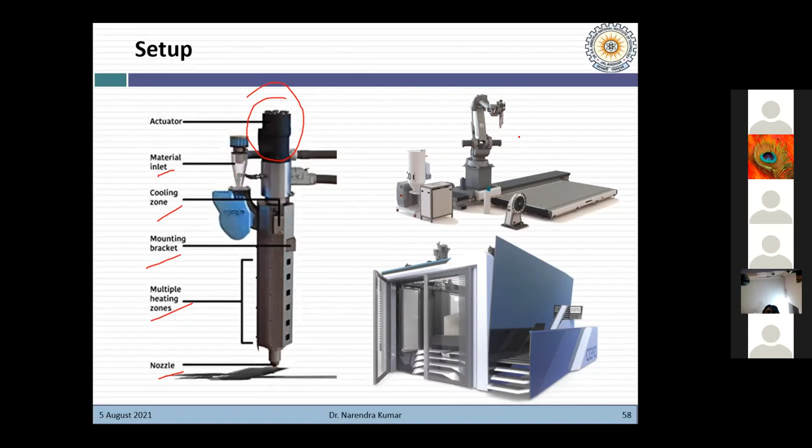So different configurations are there, and they are selling these. I don't know the price, but you can search about it. You can search about CEAD, and you will find a lot of information about CEAD.

Compared to the, I think some sort of disturbance is coming. Please mute your mic if anybody is having a mic in unmute condition. Please mute, otherwise disturbance comes.

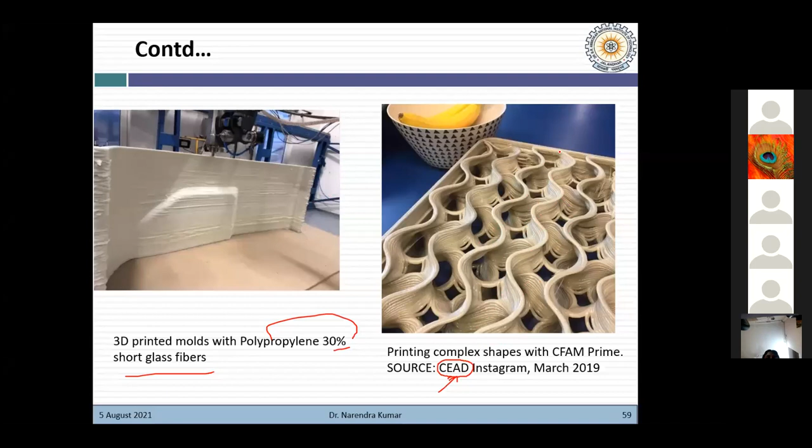So another shape you can see, complex shapes they have printed and tried. You can see the complexity and the size of the product which they are providing right now.

What is the future scope? Considering the recent progress, there is a lot of scope for further development of direct pellet printing. Combined efforts are required from material scientists and manufacturing experts. You can search for new compatible materials and find their applications, come up with new printing strategies, and attempt materials which are not available in the current material library for FFF. So a lot of scope is there, right?

Quality is also one of the challenges. We are not competing on quality, meaning we are not able to produce that level of quality currently. So that's why you can focus on quality printing of the component.